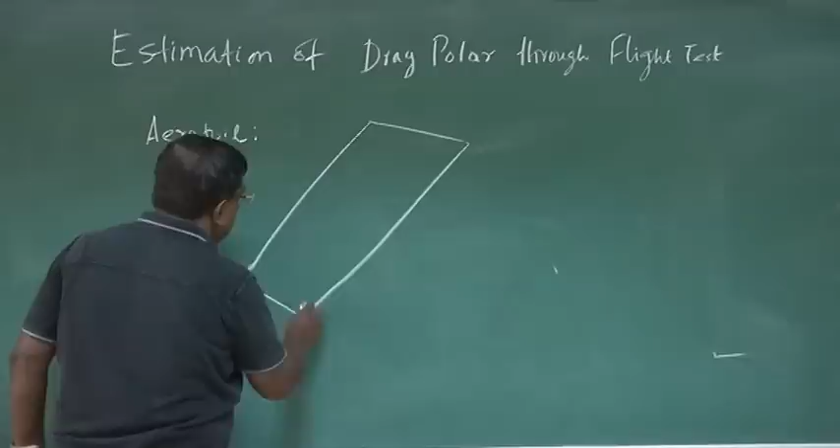Before we do that, let us recall we started with aerofoil. They are basically contours with an infinite span, infinite aspect ratio to ensure the flow is always along the chord. And wings are composed of, if you take any cross section, you will get the aerofoil shape.

Please also understand that it is not necessary that same aerofoil will be used at every location along the span of the wing. We will try to know, if time permits, how do I decide where do I put what type of aerofoil. Now suppose you ask me a question.

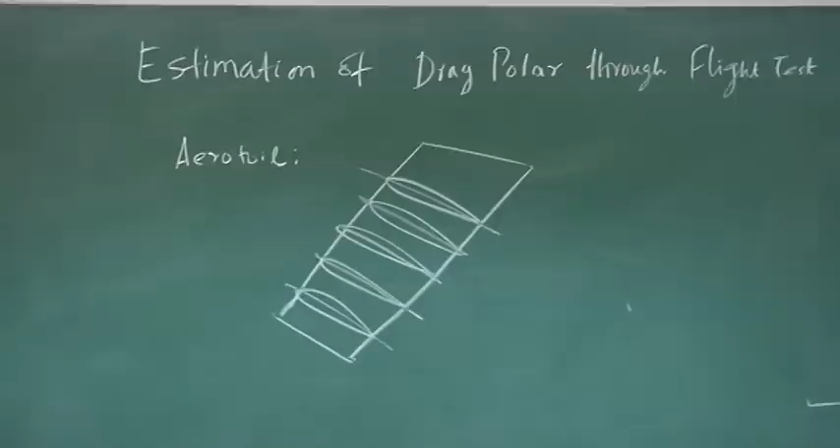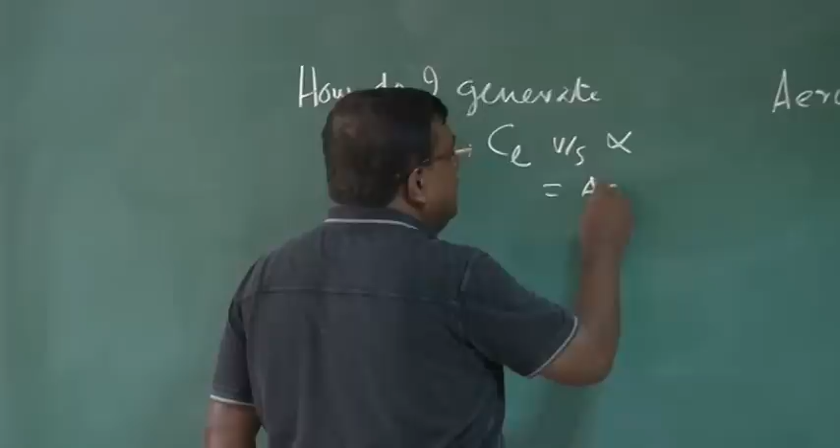How do I generate CL, two-dimensional CL versus alpha for aerofoil? Do you think you have asked me a complete question? Is it a correct question? No, it's not a correct question. The question is not complete. The question should be, how do I generate CL versus alpha for different Reynolds number? This is important because we know that CL depends on Reynolds number also, and very importantly, yes.

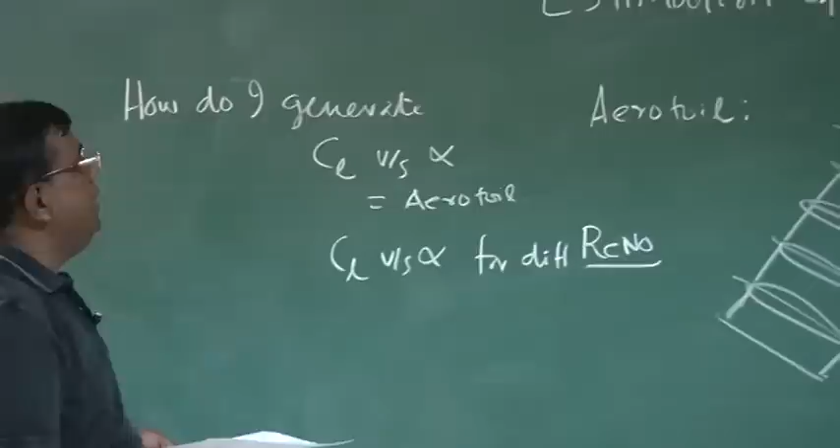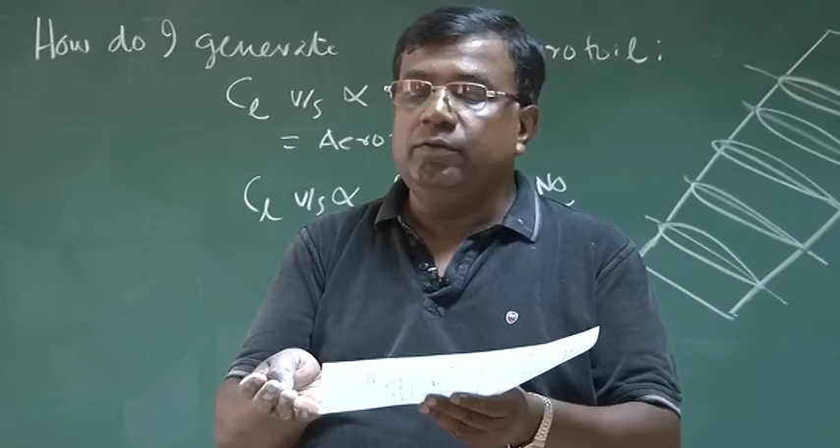So if you now ask me second question, how do I generate this experimentally? Because aerofoil shapes are of infinite span, as I tried to explain. But remember, why do we say infinite span? We say infinite span because we do not want any flow to go like this or come like this. That is why we model it as infinite. So the practical, pragmatic way of doing it is, go in a tunnel and end to end you put a wing which is having this shape. Contour is decided by the aerofoil, and now the whole wing is just touching the wall of the wind tunnel.

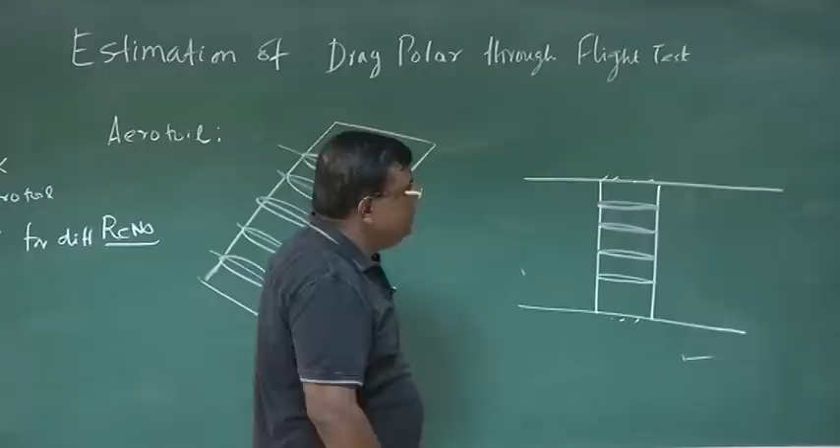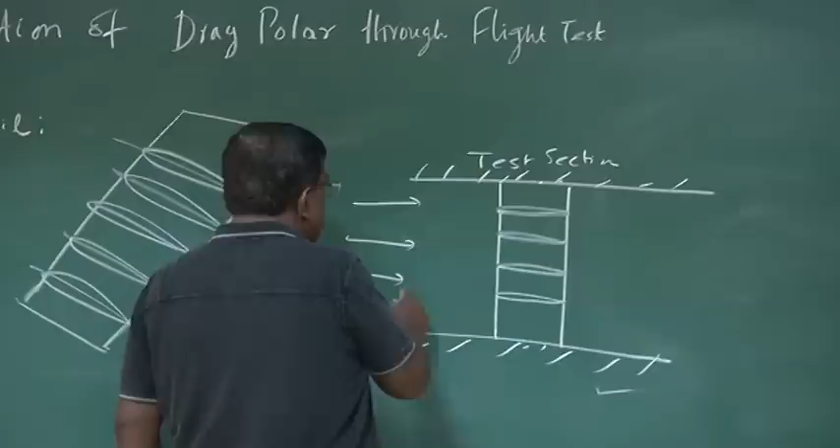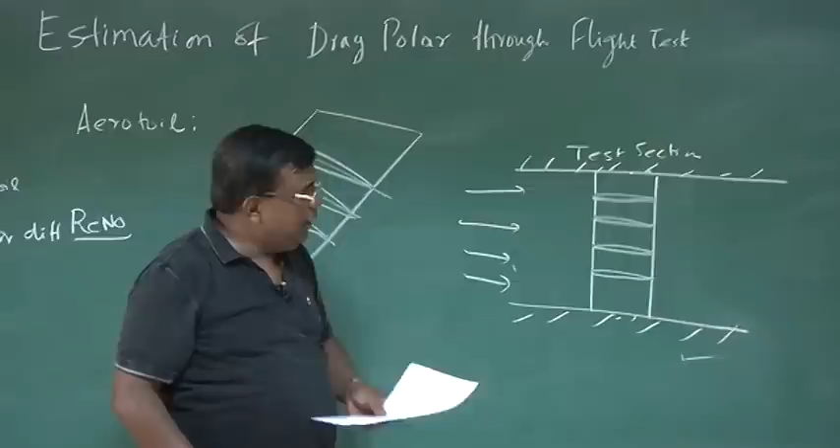This is the wind tunnel test section. And air is blowing like this. If the wingtips were not touching the wall, then it would have behaved like a finite wing. But there is a gap, flow will come like this. So by ensuring that they are touching the test section wall, we are avoiding that. But barring some effect here near the wall, which is wall effect, which can be handled through calibration, mostly the flow will be along the chord, a two-dimensional flow, and it is what is consistent to our understanding of an aerofoil.

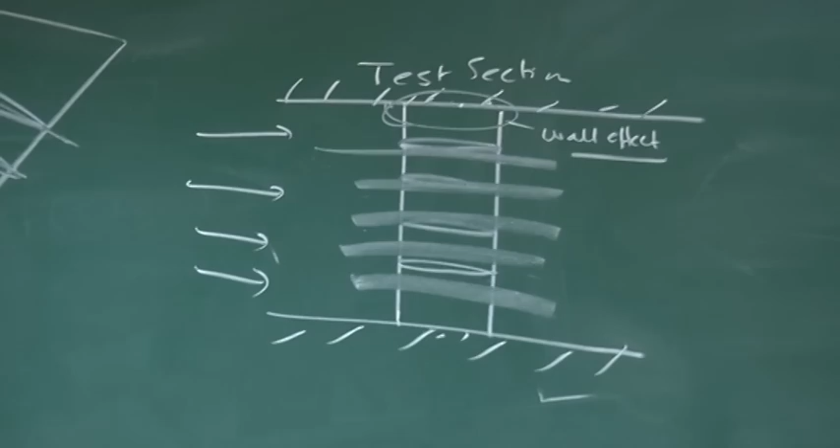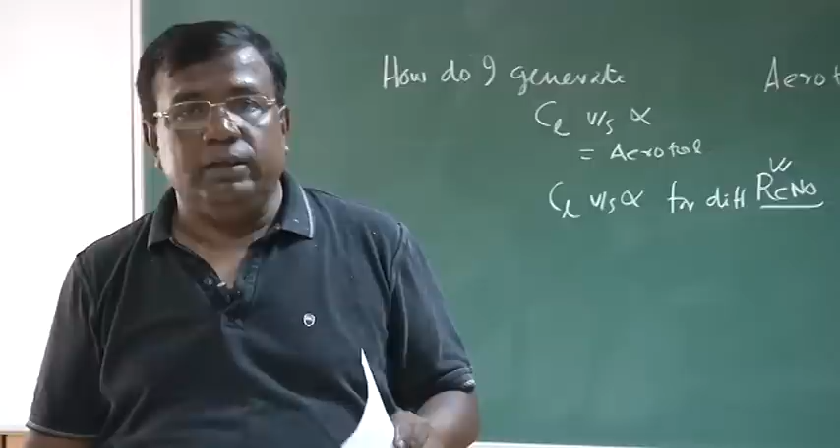So I will put a load balance, I will go on measuring CL for different angles. But since it is for different Reynolds number, I must ensure what is that angle and what is the Reynolds number. So I can go on generating different values of CL for a given angle, and I go on changing the Reynolds number. I can change the Reynolds number by changing speed, by changing density of air inside the tunnel. So many combinations are there. I can change the Reynolds number.

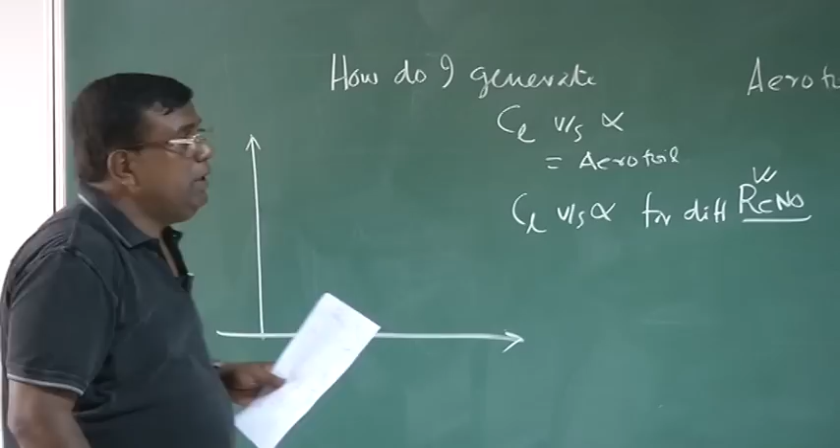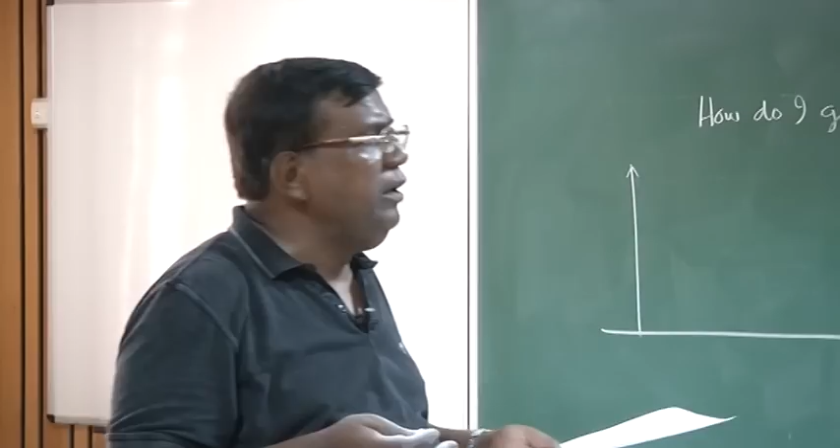So typically, if you see a database of aerofoils, which will give you the CL, CD characteristics for different aerofoils, they have been generated through experiments, right? And each aerofoil is nomenclatured depending upon what is its nose radius, what is its thickness to chord ratio, and there is a standard nomenclature. We'll try to address that nomenclature before I come to some aspects of design.

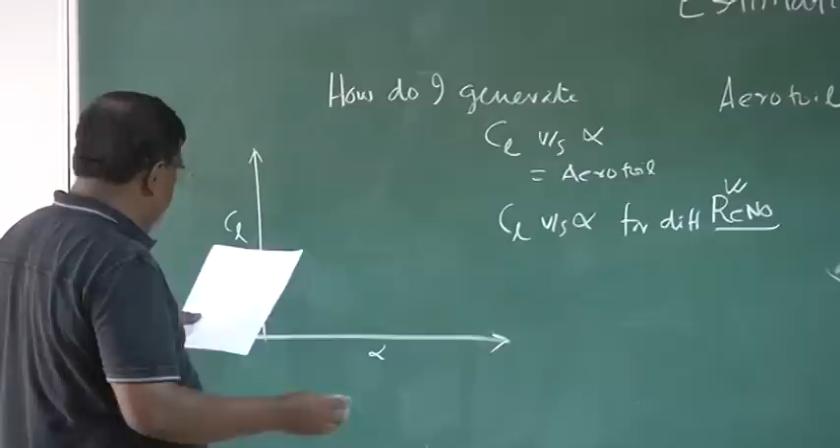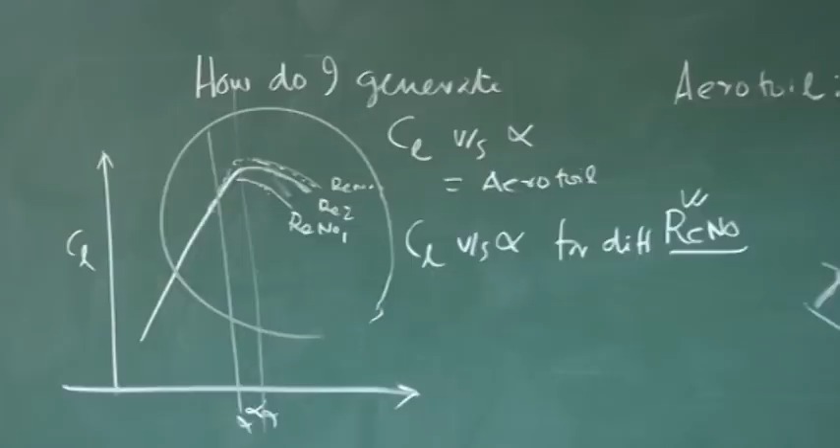But if you see this CL versus alpha graph for any aerofoil you pick up, you'll find it is given something like this. And here, for different Reynolds number 1, Reynolds number 2, Reynolds number 3, you'll find same alpha, but depending upon Reynolds number, the CL value will go on changing. So this is very, very important to capture and make your understanding very clear.

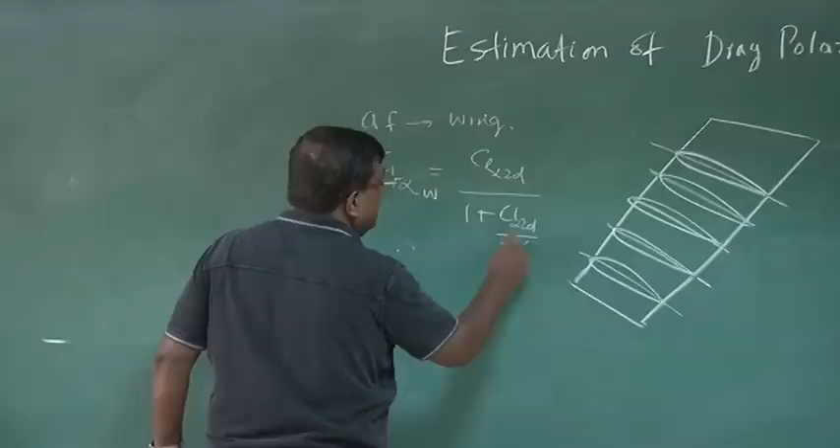Once you have knowledge about this aerofoil to wing or finite wing, we know how CL alpha of the wing is related to CL alpha 2D of the aerofoil. This is CL alpha 2D by 1 plus CL alpha 2D by pi aspect ratio E. This is already something we have done. So we do this correction and try to find out the total CL of the airplane by estimating CL of other components as well. I am only focusing on the wing, and the same thing can be extended directly for the tail also.

But we are talking about drag polar, so we'll try to understand a little bit on the drag part also. Very small part, very important part. If you see 2D aerofoil data,

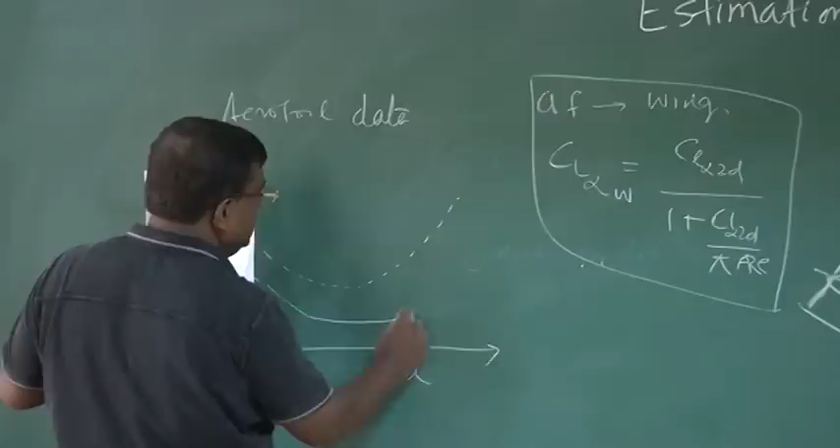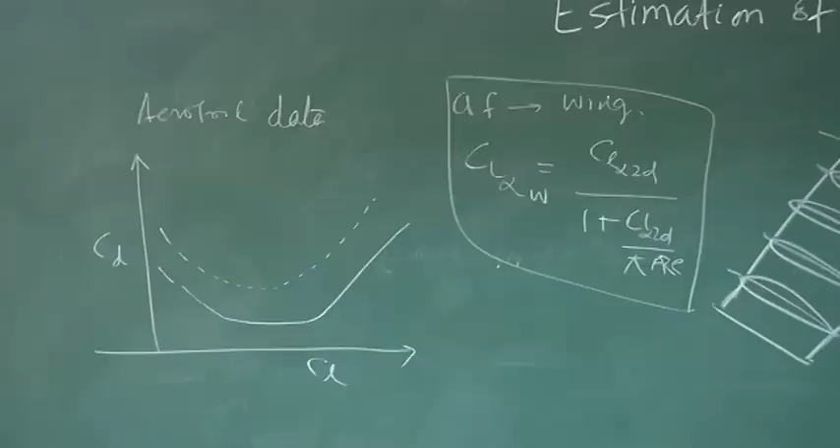we'll also see that the data sheet or database gives CD versus CL, something like this. Some are something like this, depending upon what type of aerofoil you are using. That is depending on the type of contour you are using. What is the maximum T by C? What is the leading edge radius? All such issues are there, right? And you can customize your aerofoil, right?

But what is important here, if you see as CL is increased, let's say this, if I consider this part, there is an increment in CD. And almost it gives almost like a, maybe may not be correct, but almost like a quadratic. But it's not a correct statement. But trend wise, you may see it is almost quadratic. So what do you think?

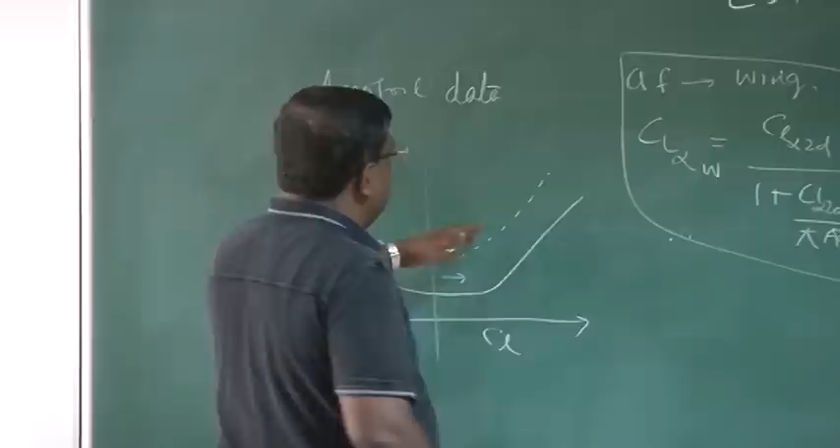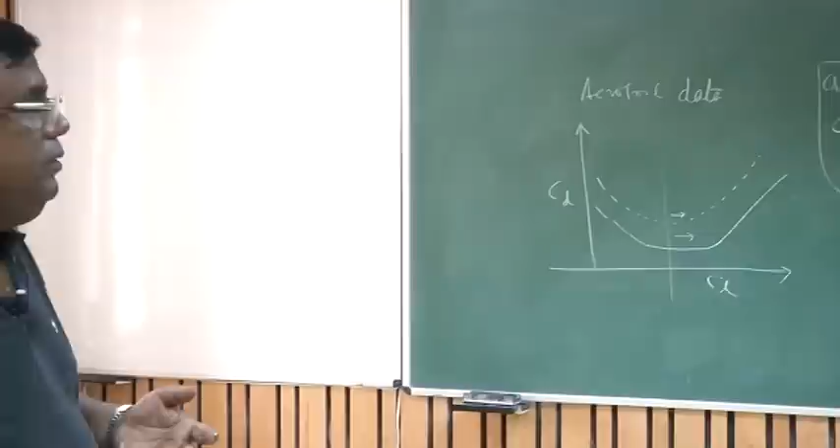Is this because of induced drag? That is my question. Is it because of induced drag? That is my question, okay?

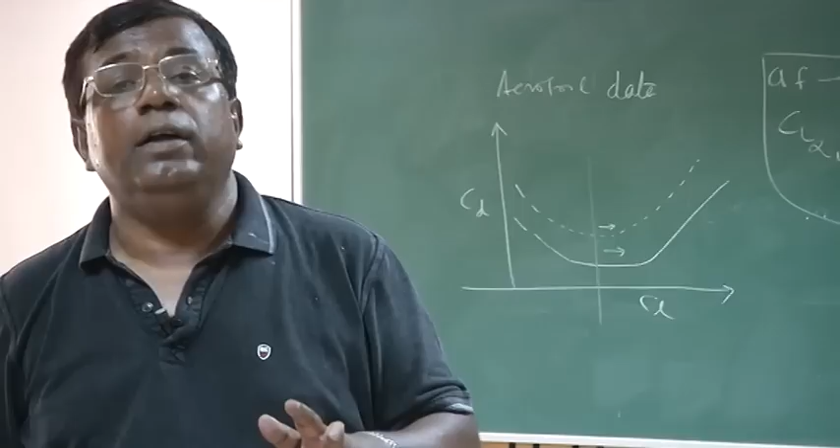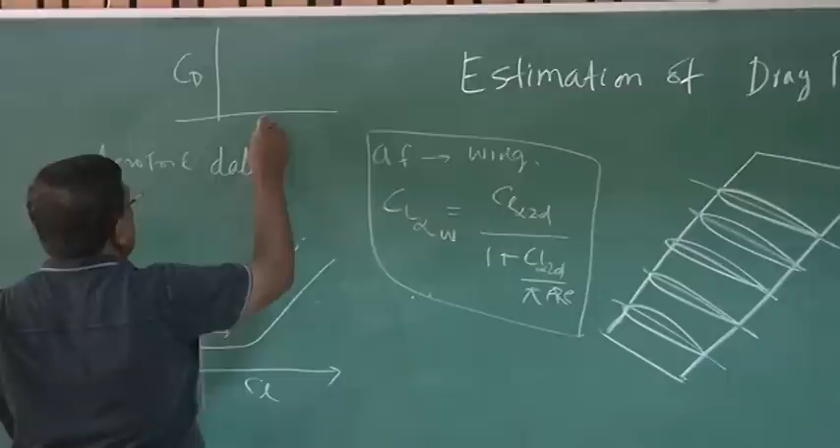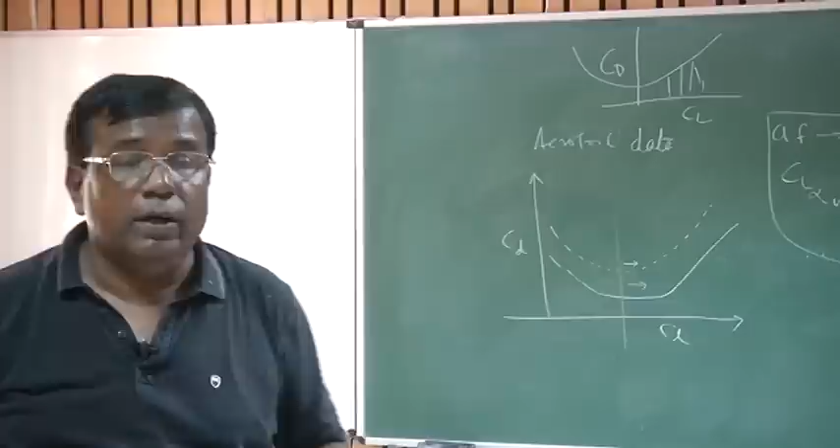Please understand, I cannot talk of induced drag when I am talking about aerofoil. Be very clear, because it's an infinite span, so there is no question of finite wing effect. So this trend of increase in CD because of increase in CL should not be interpreted as a contribution because of induced drag. Correct? For 3D, for a wing, we have seen the CD and CL graph goes something like this. And this part, all these things increase because we talk, this is because of the KCL squared term. CD naught plus KCL square, that is the drag polar. But when I see a 2D aerofoil, caution is this increment is not because of induced drag.

This is primarily due to flow separation. And this is a complex field, right? People are working on this. I have been talking to one of our honored researchers, and I could get this feeling that yes, a lot of fundamental work is also going on into this.

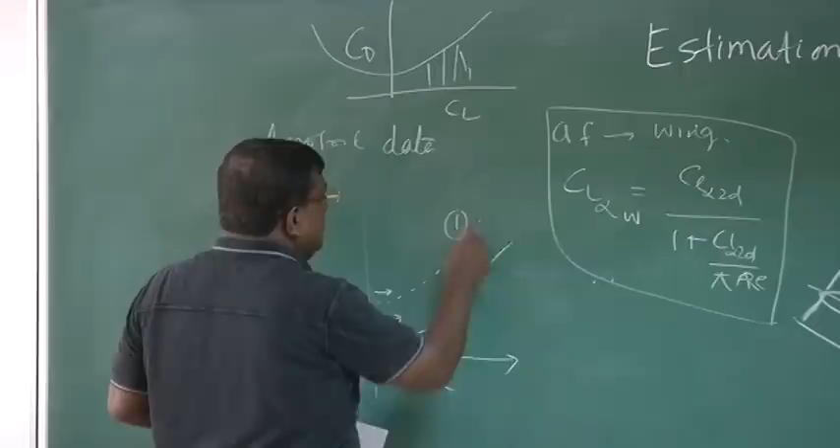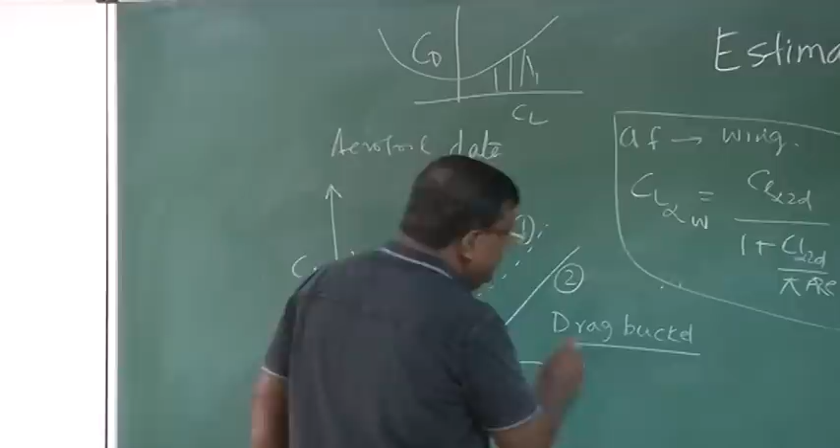This is one, right? Second part, you will see some aerofoil data where CD versus CL have a bucket type shape. We call it drag bucket. What is the significance or importance of drag bucket, or how can I use this?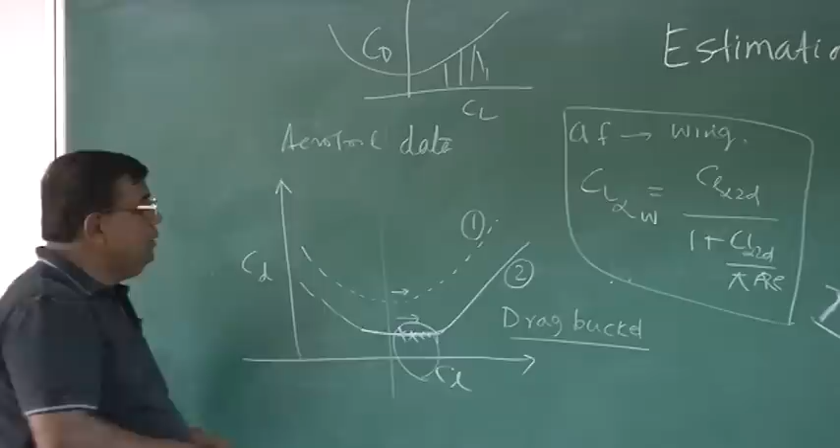You see, one thing, if I am flying the machine at CL close to this drag bucket zone, then there is hardly an increase in CD because of this. But if I am flying somewhere here, then I will have unnecessary increase in CD because of increase in CL, in addition to induced drag. That is something different, okay?

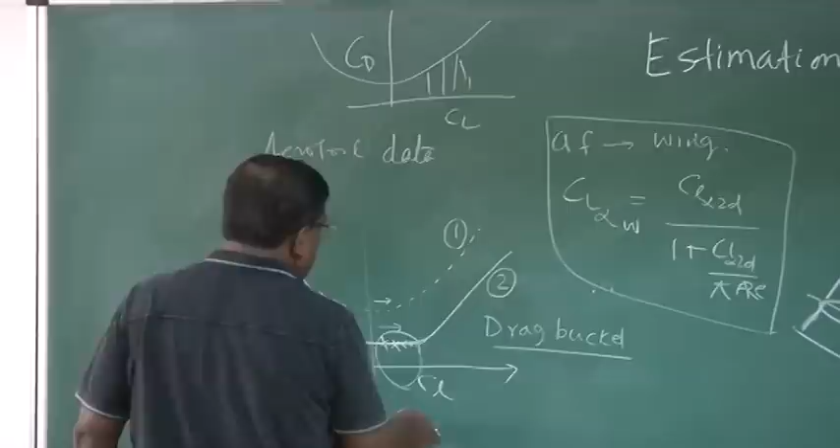So a good designer will try to select the CL so that I am operating somewhere in this drag bucket. Or if it demands that the standard aerofoil is not able to fit that requirement, then you customize your aerofoil.

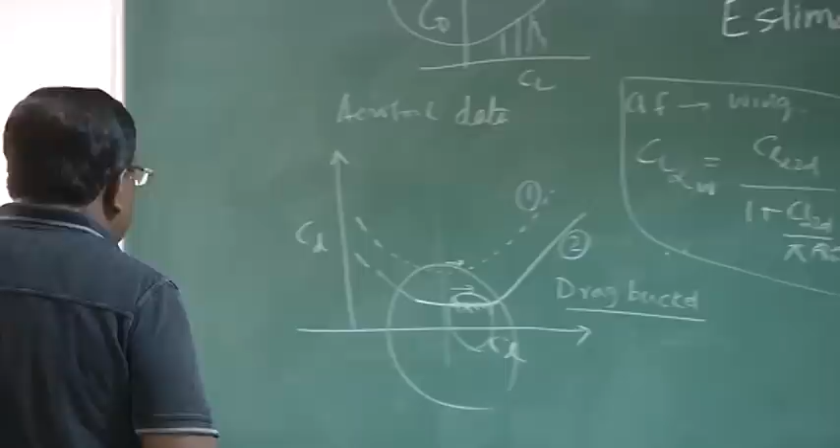Knowing this now, we want to estimate drag polar through flight test. Now it is something like this. You are given an aircraft, you are a pilot, and it is told to you, go fly and find out, tell me what is the drag polar of this airplane. So what we should do, we know one thing, that if I cruise,

then thrust is equal to drag and lift is equal to weight. We are so much using this. So I multiply both sides by V: T into V equal to D into V, which is nothing but half rho V square S into CD naught plus K CL square, into V. So again I write T into V is half rho V cube S CD naught plus half rho V cube S into K into CL square.

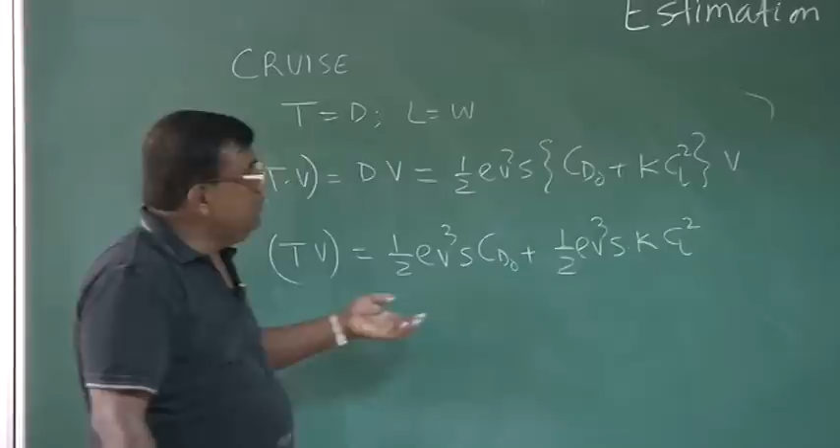What do I do now? I now know that lift equal to weight. So CL is equal to 2W by rho S V square.

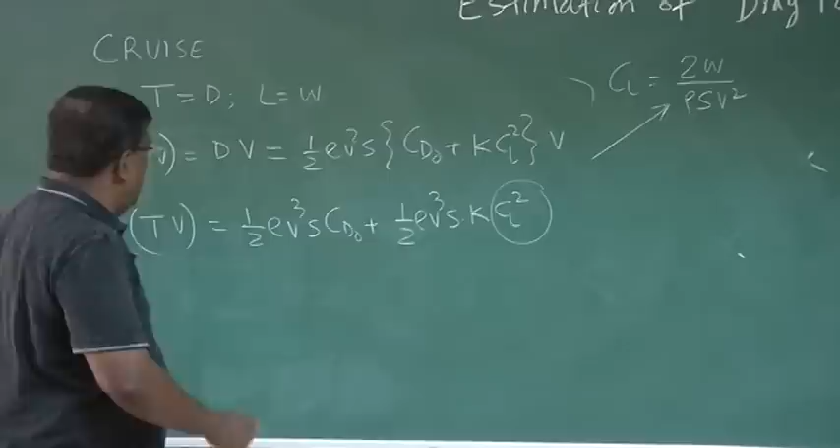So what I do, I replace CL square using this CL. So I have now the expression: half rho V cube S CD naught plus half rho V cube S K into 4W square by rho square S square V to the power 4. No objection? Everything fine?

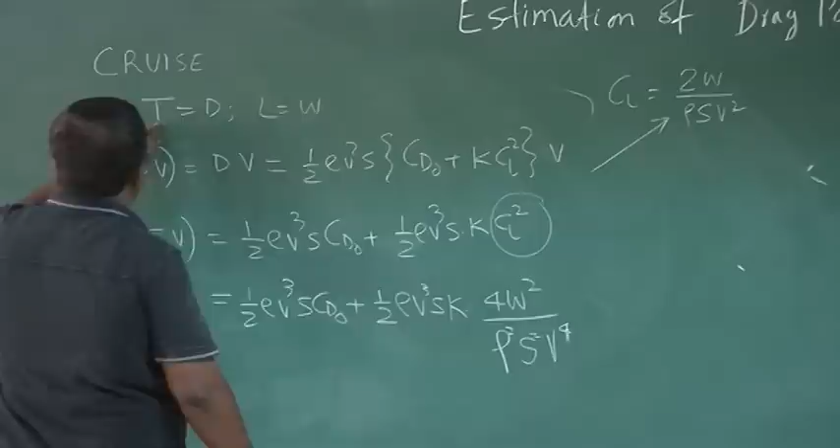If everything is fine, try to understand what is T into V. T was thrust required equal to drag. So if I want to cruise, I must ensure my engine is providing that much thrust. What was T into V then? T into V is power available.

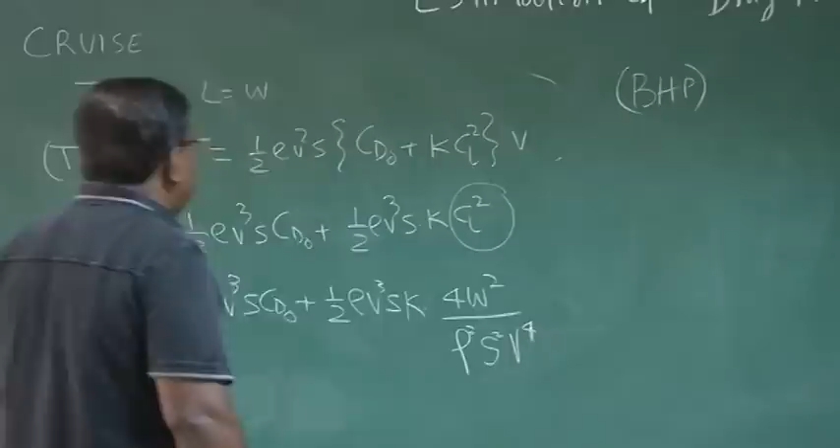So for our understanding, we will write T into V so that we don't get mixed up with brake horsepower, keeping in mind that this is available from the engine. This is equal to half rho V cube S CD naught plus 2K W square divided by rho SV. Okay, now what?

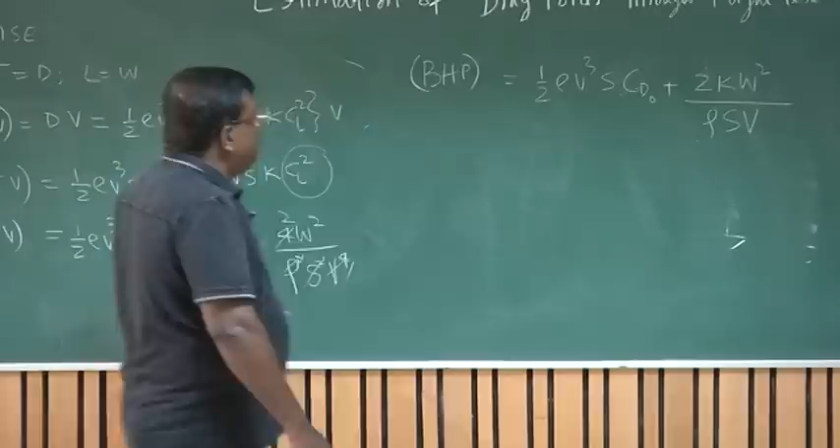What is our aim? Let us not forget. We want to estimate drag polar, that is CD naught plus K CL square. That is, if I can estimate K and CD naught from flight test, then I can express the drag polar as CD naught plus K CL square. That is a simple question. So my eye should be fixed to know clearly that my aim is to estimate CD naught and K.

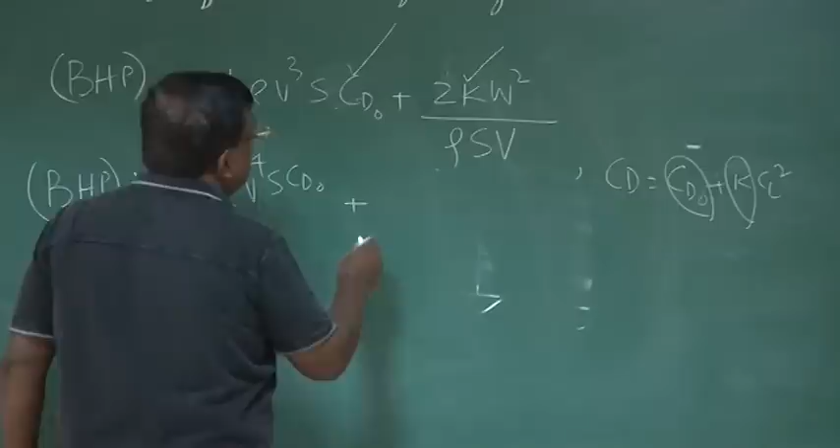Now we do a little bit more arrangement. What we do is multiply both sides by V. So what I have is BHP into V equal to half rho V to the power 4 S CD naught plus 2K W square by rho S.

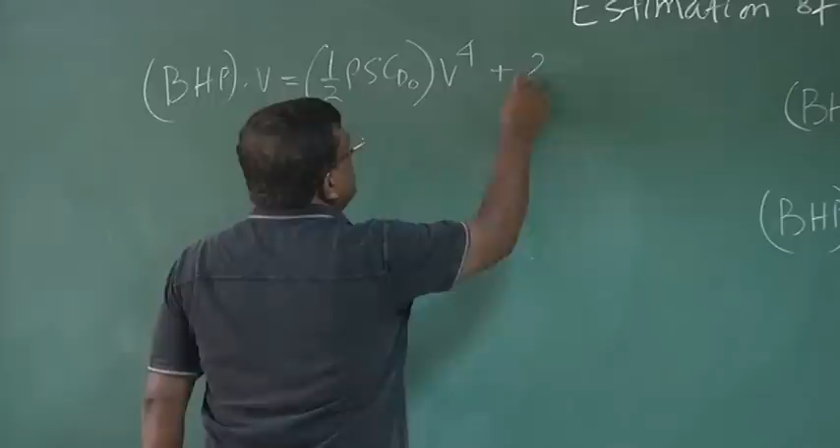But if I do further rearrangement, I can write it separately because we will be planning our experiment based on this expression. So I have BHP into V is equal to half rho S CD naught V to the power 4 plus 2K W square by rho S.

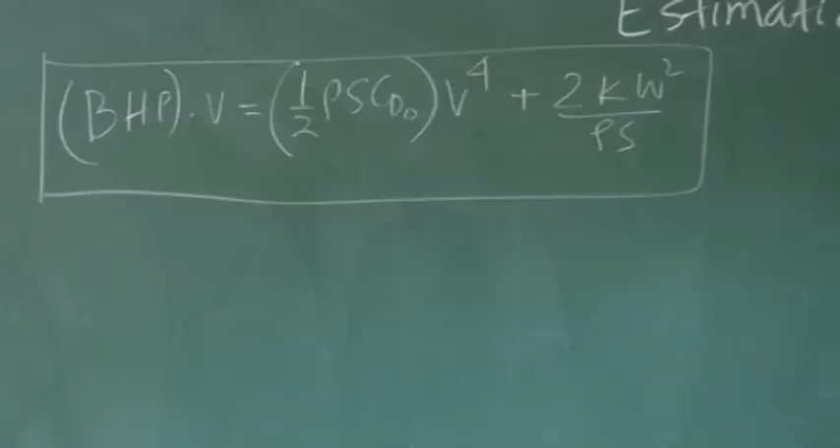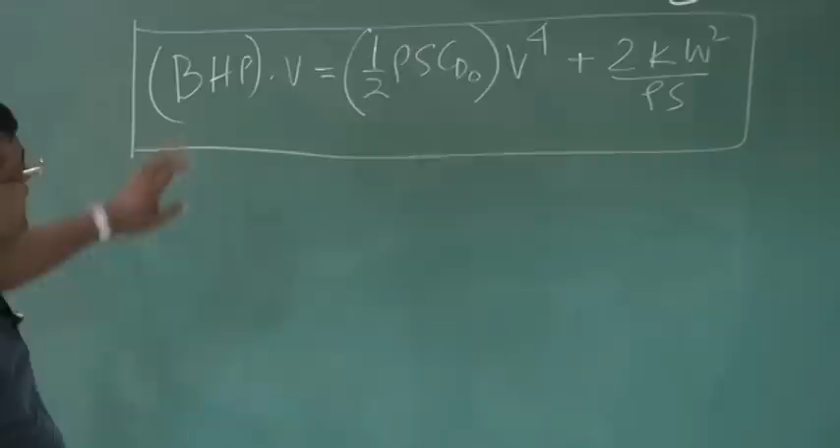Let us ask ourselves, what are those variables I can measure? What is BHP? BHP is an engine parameter. Engine manufacturers give charts, they give the calibrations. So if you know what is the temperature outside, what is the RPM, what is the manifold pressure, meaning roughly the pressure at which the mixture is taking place, as far as BHP is concerned, I can get it easily through the manufacturer's chart.

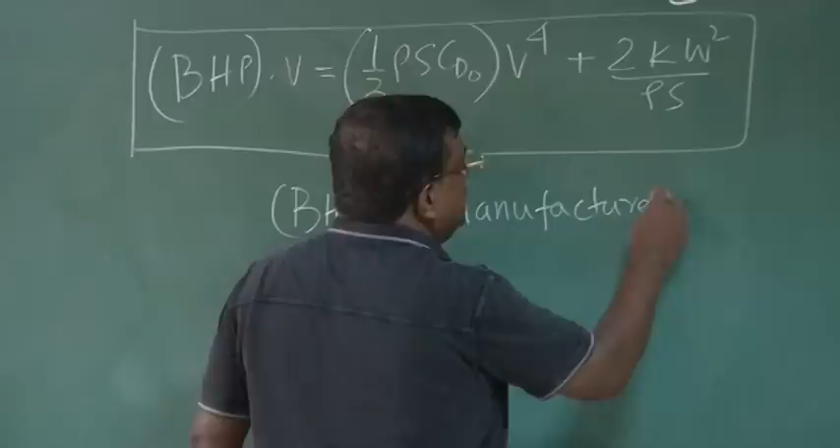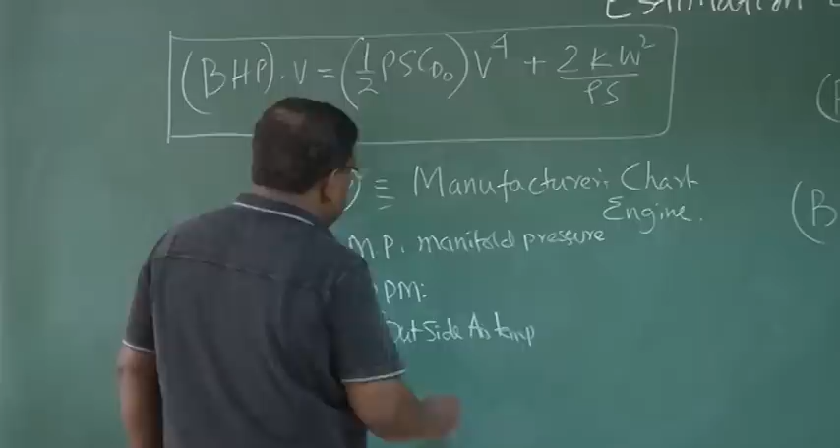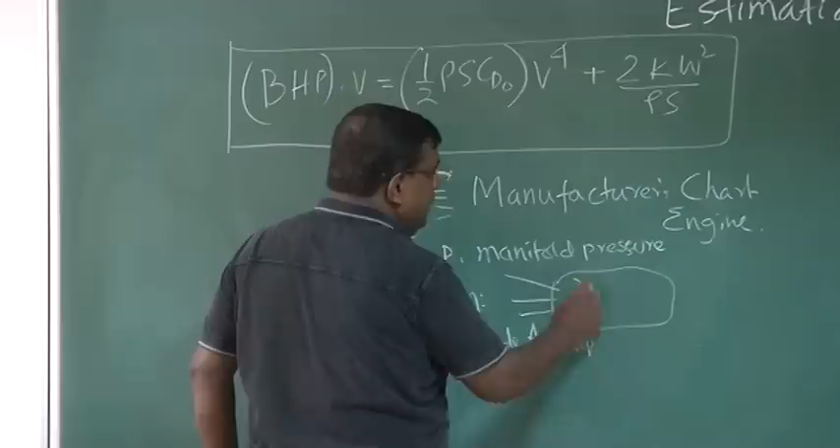Engine chart essentially tells you, if I know manifold pressure, if I know RPM, if I know outside air temperature, then using the engine chart I can easily know what was the power available from the engine at that speed. If you see here, all this information you get in the cockpit. You have seen instruments that give readings for manifold pressure, RPM, and outside air temperature, so this is in my control.

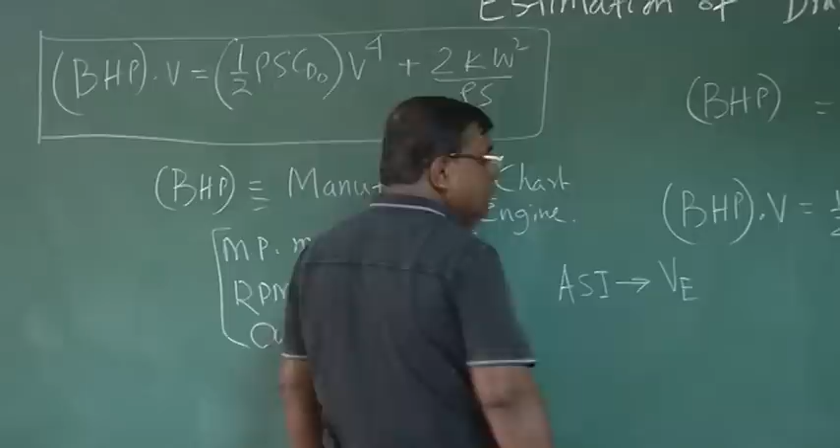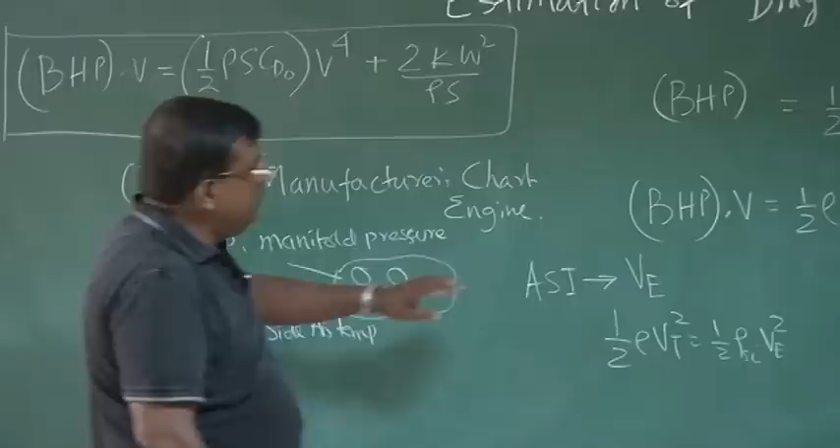S is the wing area, which is known. What is V? V is the true airspeed. How do I get V? I know by now that we have an airspeed indicator which gives me V equivalent. Remember, we write half rho V true square equal to half rho sea level V equivalent square. That is how the airspeed indicator was calibrated. So if I know V equivalent, using this relationship, I can get V true.

But for that, I need information about the local density there. I know the outside air temperature, so I can use this. Again, I can find out rho. I can find true airspeed.

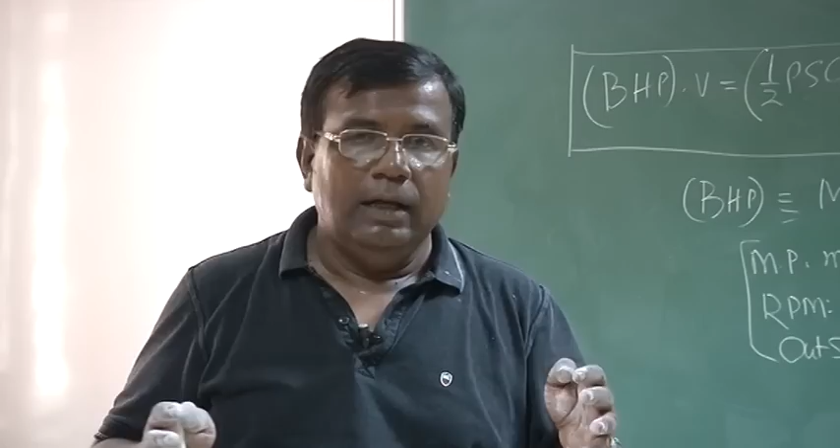The other important thing is W, weight. The issue with weight is, when I go for takeoff, I'll take the weight of passengers, fuel, etc. But when I'm doing the cruising, some fuel is consumed continuously. So which weight should I take? The best way is, when I do an experiment, I find out how much time has elapsed, and from there use the fuel consumption chart to see how much fuel is consumed for that time, and deduct that much fuel from the weight.

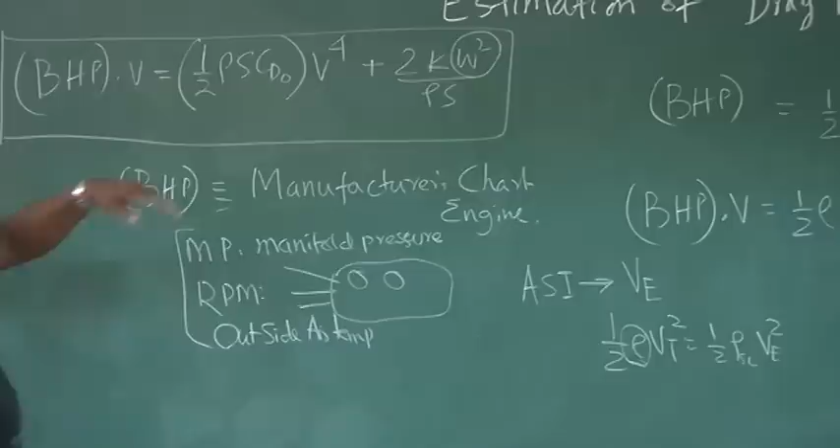The second approach is, when I land, I again weigh the machine with all the passengers and take the average weight. You'll find they will not come off very much. So this is how I get this information. But so what? Question is, okay, I can measure all these things, so how do I find CD naught and K? That is the question.

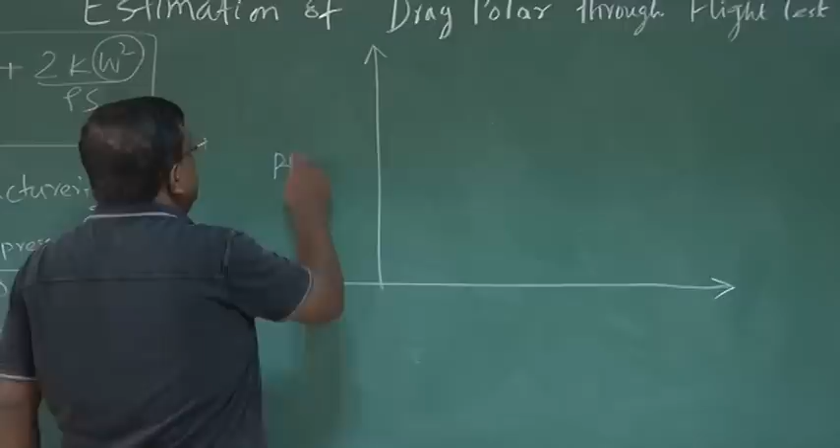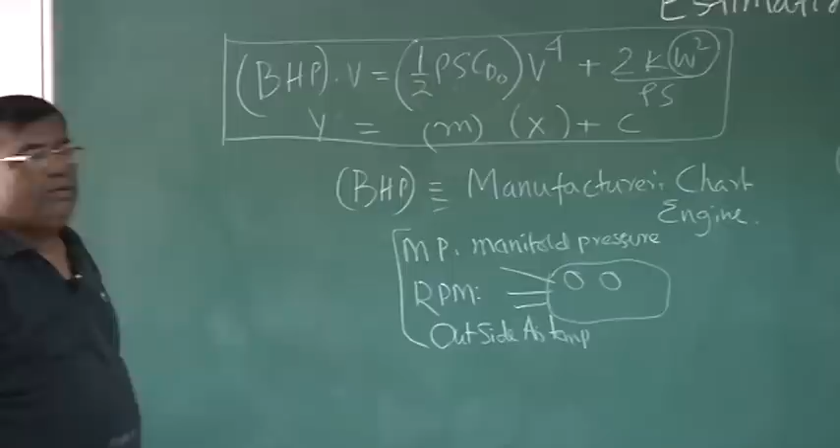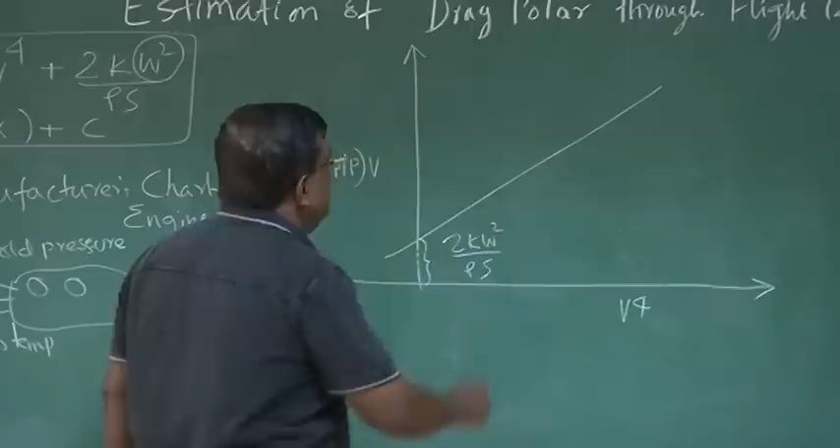If I plot a graph between BHP into V versus V to the power 4, what sort of curve will we get? See, BHP, so I say Y equals M into X plus C. So what sort of graph should I get? I should get a straight line, and this should be my 2K W square by rho S, because that's the intercept, and the slope will be equal to half rho S CD naught.

Once I measure this intercept and slope, I can find out CD naught and K. This is the understanding. But how do I do it? Through experiment. Try to understand.

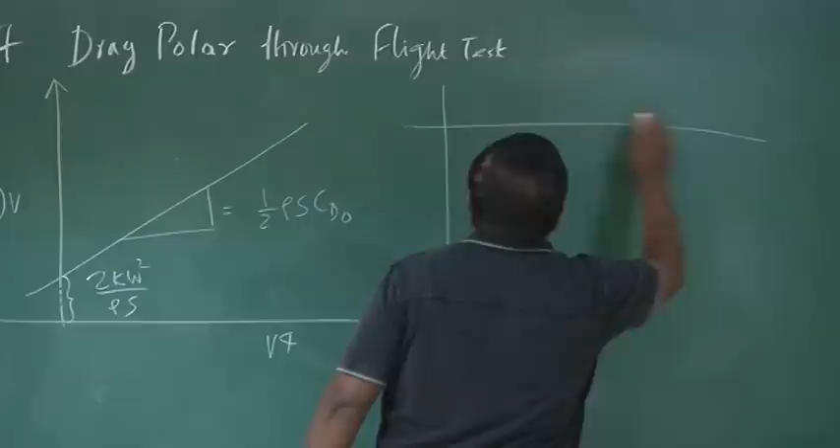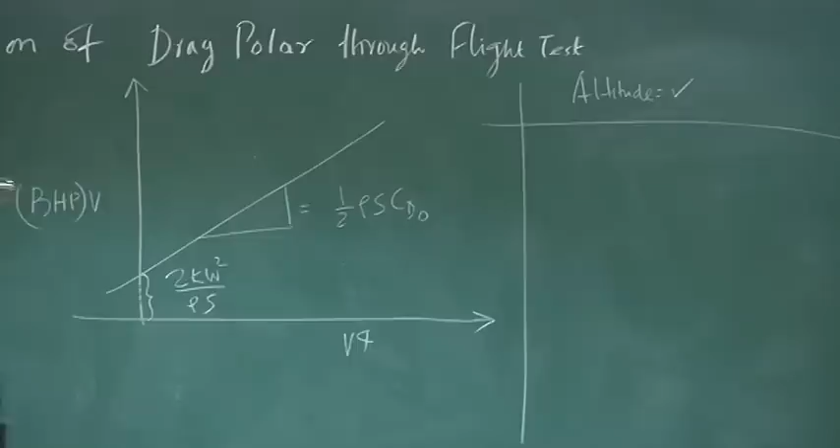So what we should do: we go for a cruise flight, and then we note down the altitude. Who will give us altitude? The altimeter, it will give us pressure altitude, don't forget that. Then I note down the outside air temperature, again using a gauge to measure it. So I take this reading.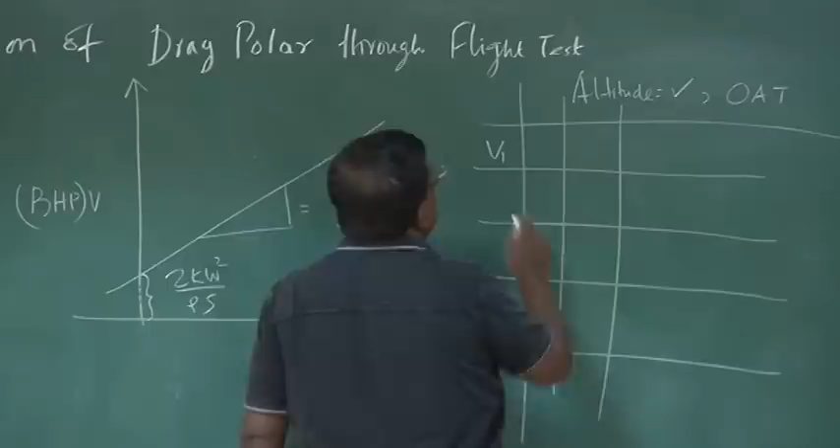Now I ask the pilot to maintain a cruise with a speed V1. And what should I note down? I note down the speed, the manifold pressure (MP), and RPM of the engine.

Once the pilot is okay with the cruise at V1, you check the airspeed indicator, whether the speed is the same or not. You check the altimeter, whether the height is constant or not. You check the bank indicator, whether it's level or not. Once you're satisfied, you note down what is V1, what is manifold pressure, and what is RPM.

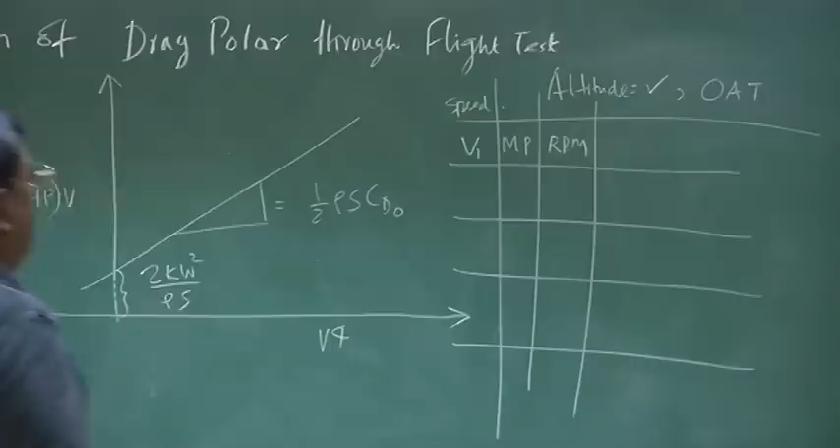Then again you request the pilot to cruise at a speed V2, and again you note down the manifold pressure and RPM. You do this for 3 to 4 or 5 readings, taking readings like this.

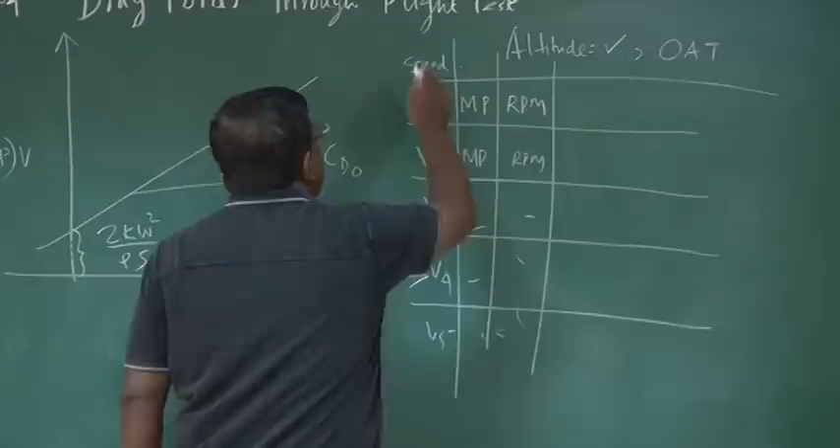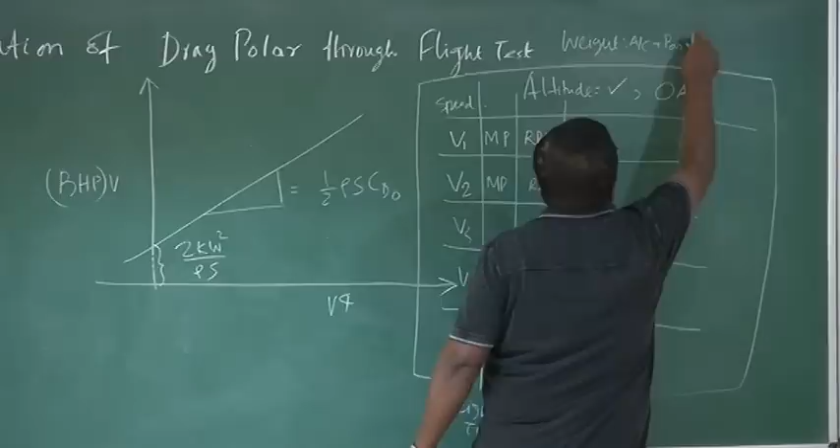And then you come down and take the weight at touchdown. Of course, before you went for the experiment, you must take the weight of the aircraft plus passenger plus pilot, total weight, and note it.

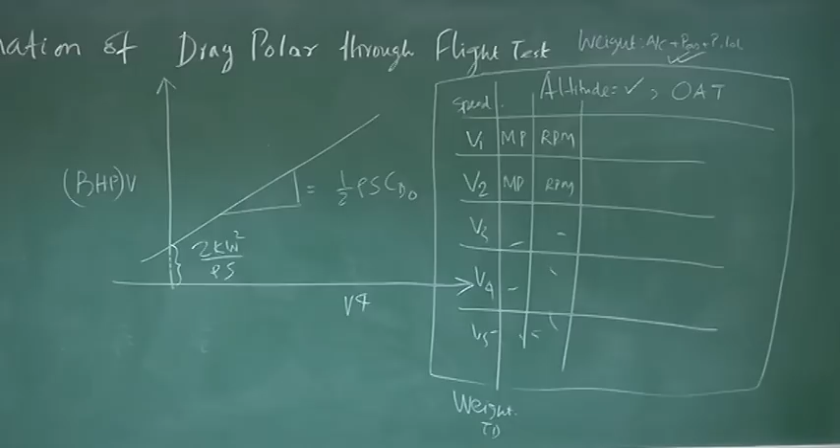A wiser man will note down the time, carrying a stopwatch also, because we like to see the time during which I was cruising. So he will try to find out the fuel weight and reduce it from the total weight.

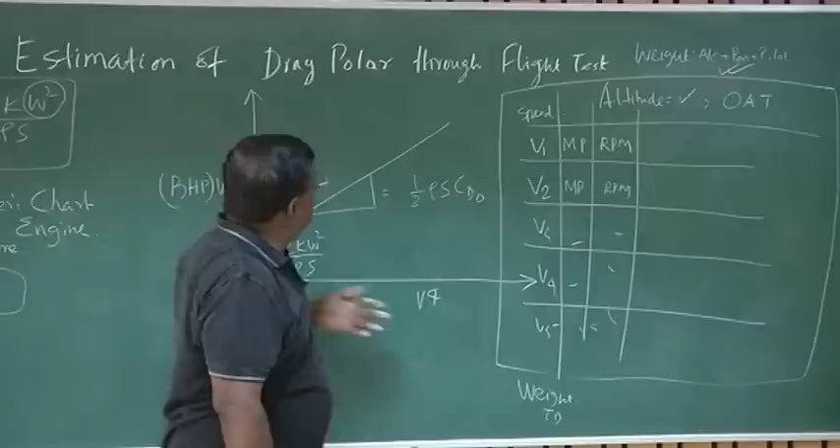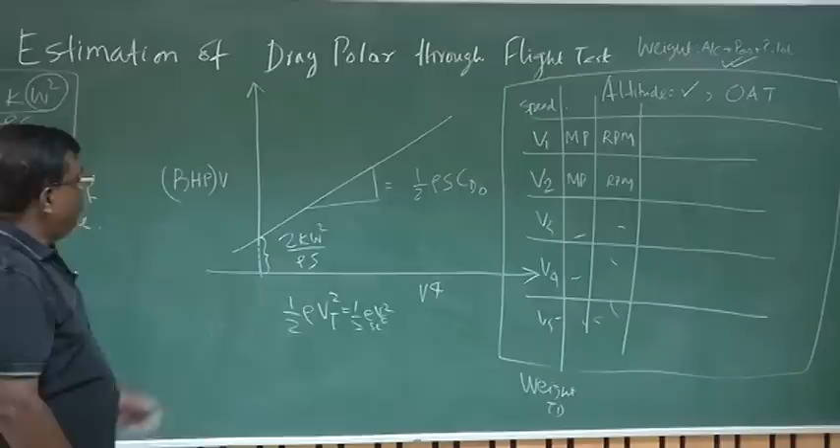Okay, so I know all these things. Now it is simple for me. I'll use manifold pressure, RPM, and outside air temperature to find BHP. I will use equivalent airspeed and density to find V, using the relationship half rho V true square equal to half rho sea level V square. Rho I'll find out through outside air temperature and the standard atmosphere table.

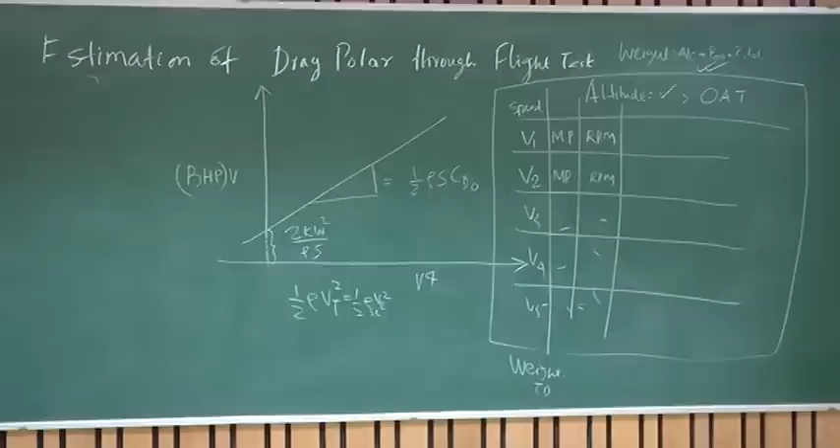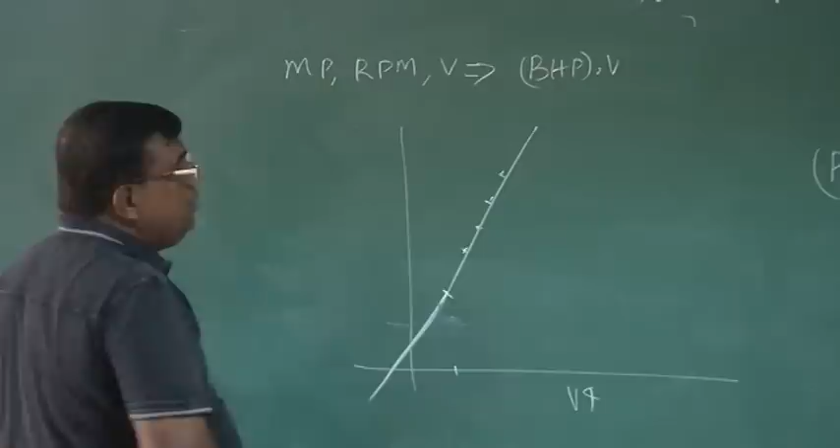And now what will I plot? You know manifold pressure, you know RPM, you know V, so you calculate BHP into V, and V to the power 4. For each V you get a point, and whatever BHP into V you got, you get another point like this, plotting several points, and then fit it with a straight line because you know they will follow a straight line. Sometimes you have to find the best fit because there is measurement error.

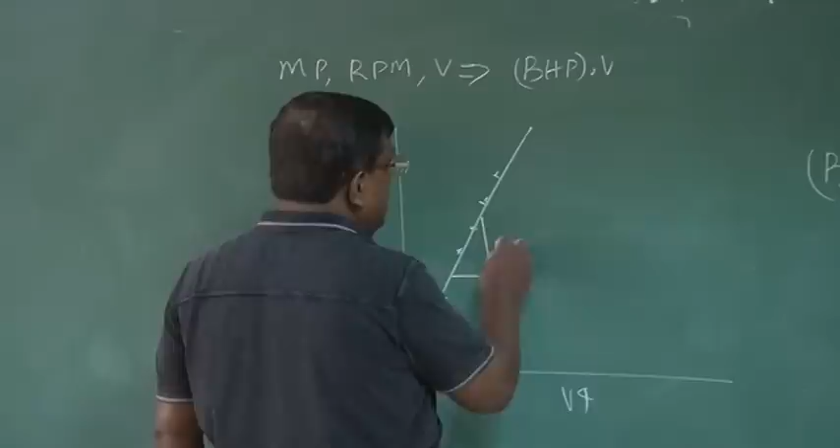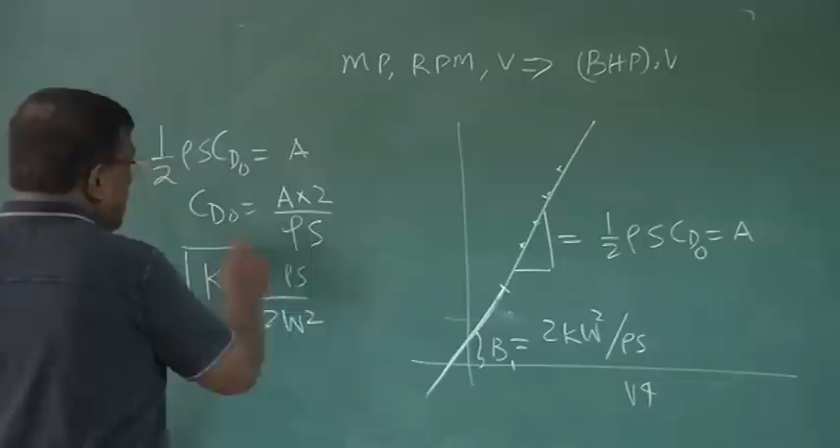Once you do that, you take the slope, call it A, equal to half rho S CD naught, and the intercept, call it B, equal to 2K W square by rho S. So CD naught will be equal to A into 2 divided by rho S, and K will be equal to B into rho S by 2 W square. So from there you now know the value of CD naught and the value of K.

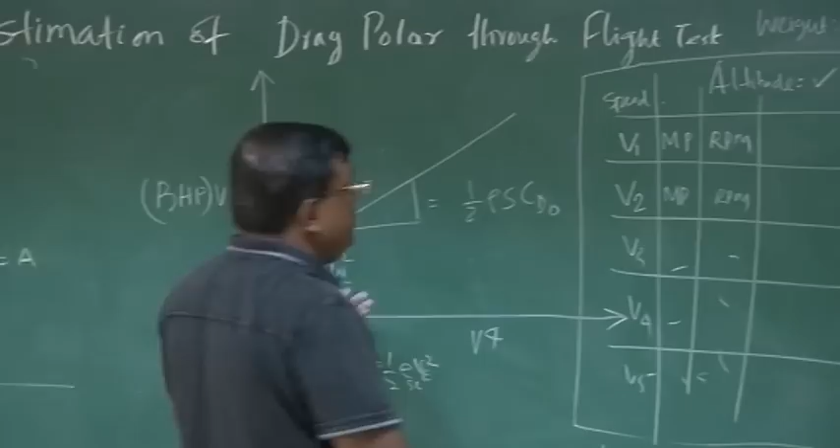So you postulate CD equal to CD naught plus K CL square. That is how you can get the drag polar, estimate drag polar through flight test. Is it not wonderful?